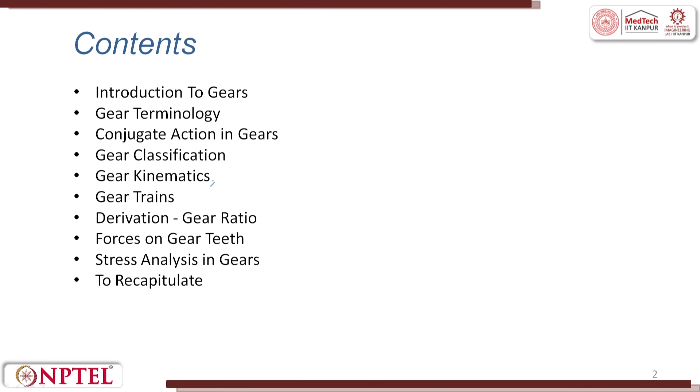Introduction to gears. If you look at all the photos here, these are all different types of gears. You can see gears where the gear teeth are along the axis of rotation, or at an angle inclined to rotation. Here you will see two gears which are trying to mesh. This is an input, this is an output. So, you can try to have multiplication or you can try to reduce, whatever you want. So, all these things are gears.

A gear is a rotating machine element with teeth that mesh with another toothed part to transmit torque. The teeth can be inside, or they can be on the periphery. The mating partner should also have gear teeth. Gears are used to change the speed, torque and the direction of the power source.

They work by transmitting rotational motion and force between two or more shafts, which allows for precision control of mechanical systems. A Swiss watch, where the time used to be very minutely controlled, has a lot of gears. One of the engineering marvels in the mechanical engineering domain is watch manufacturing, very precise watch manufacturing, which happened 150 years ago.

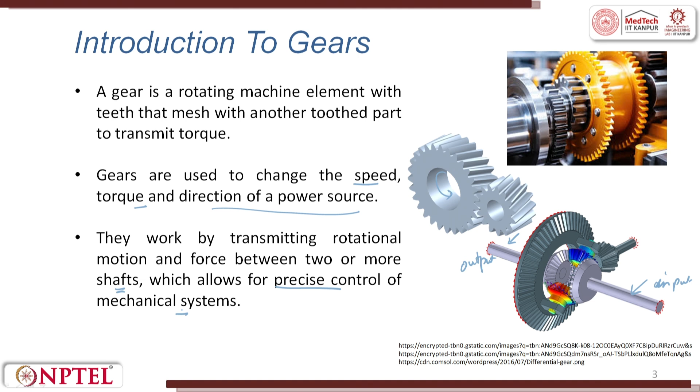Applications. Gears are integral to many mechanical systems, including automobiles, automotive transmissions, industrial machinery, clocks, and even small devices like electric drills. This is the example I was trying to talk about, the internal gear. Inside you have teeth, and then you have a pinion which goes around it, meshing the teeth.

So, this is worm and worm gear, wherein you have a worm and this is the worm wheel. Here you will have teeth with a similar profile, so these two mate with each other. You can have external gears. You can have rack and pinion, wherein the rack is for straight line motion and the pinion is for rotary motion. You can have a pawl and ratchet mechanism, which we saw in the previous lectures.

Screw gears are also there. Almost all different types of gears are shown here in this figure. Their ability to efficiently transmit power and adjust the mechanical advantage makes them essential in a wide range of applications.

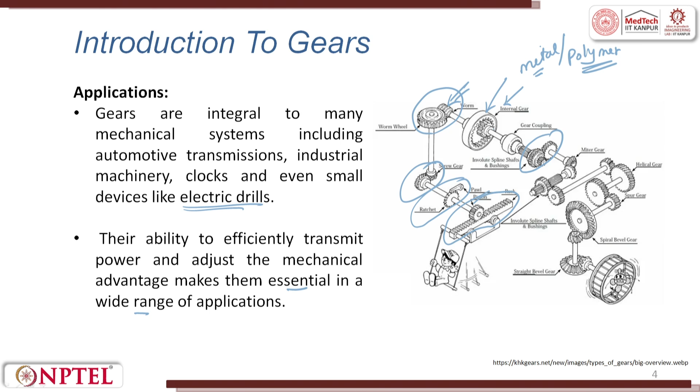You can use anything of your choice depending upon your requirements. So, gear classification based on shaft arrangement. What is a shaft? This is a shaft, and on a shaft you press fit and keep a gear, or the shaft and gear are an integral part of the same part. Both are possible. Depending upon the diameter of the gear, it can be used for multiplication or division. That means to say, for one rotation it can rotate 5 times, or it can rotate 5 times to do one rotation. Both are possible.

So, when you have parallel shafts, the gear we use is the spur gear. The most common type of gear, with straight teeth that are parallel to the axis of rotation. This is very easy to manufacture, and it also has proper meshing. Thus, these gears are used in simple machinery like clocks and conveyors, where the shafts are parallel.

Similar to the spur gear, we have the helical gear. The only difference between spur and helical is that the teeth are cut at an angle. So, what is the difference? Why do we have to go for this? Here, when it runs, a smoother and quieter run is achieved by the helical gear, and there is more contact area. So, loads can be heavier compared to the spur gear. Helical gears are used in automotive transmissions and other applications requiring high speed and high load capacity.

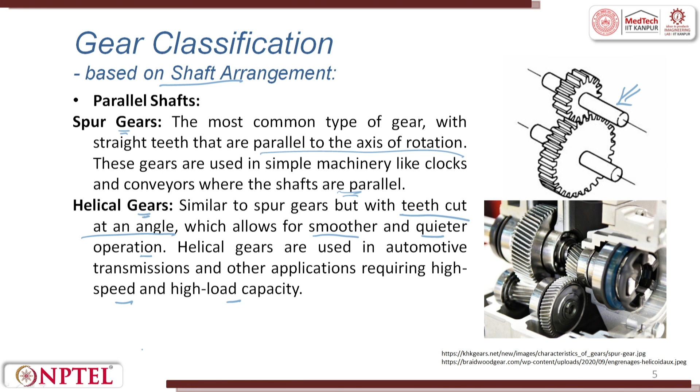Hypoid gear. These gears are similar to bevel gears, but with an offset between the axes. So, between this axis and this axis there is an offset, providing a combination of parallel and intersecting shaft advantages. They are used in automobiles for smooth power transmission. If you see, almost all the gears are used in automobiles: spur gear, helical gear, bevel gear, worm gear and hypoid gears. Everything is used everywhere. The only difference is the direction, the power and the speed. The axis from where the drive is given can be parallel, perpendicular, intersecting or non-intersecting.

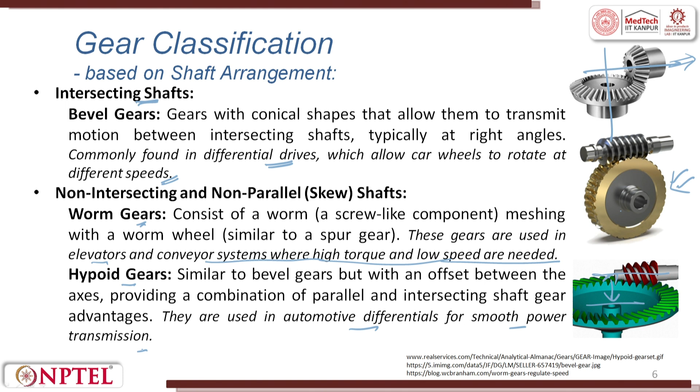So, classification based upon tooth design: straight teeth. Straight teeth are always found in spur gears. They have teeth straight and parallel to the gear axis. They are simple and cost effective, but can be noisy at high speed. In order to avoid the noise, we go for helical gears. The gear teeth are cut at an angle to the gear axis, which allows for more gradual engagement of teeth, resulting in quieter and smoother operation.

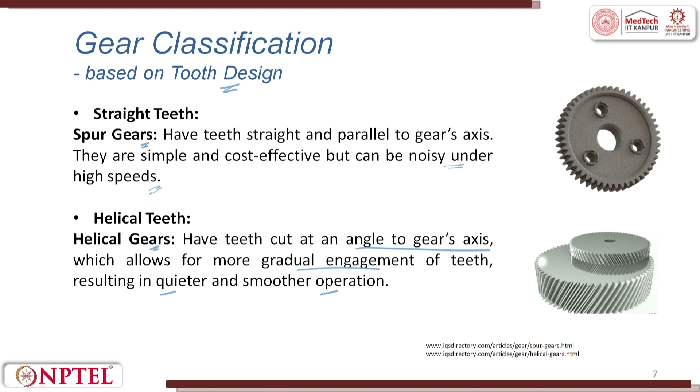You have double helical gears, or double helical teeth. Double helical teeth are called herringbone. A double helical gear features two helical sections. You can see 1 and 2. This is 1 and this is 2, right. So, two helical gears join together with opposite helix angles, which eliminates axial thrust and balances out the force. These are used in heavy machinery like turbines and compressors.

You can also have curved teeth. The teeth are all curved. For example, bevel gears often have curved teeth to provide smoother engagement and transmission of torque between intersecting shafts.

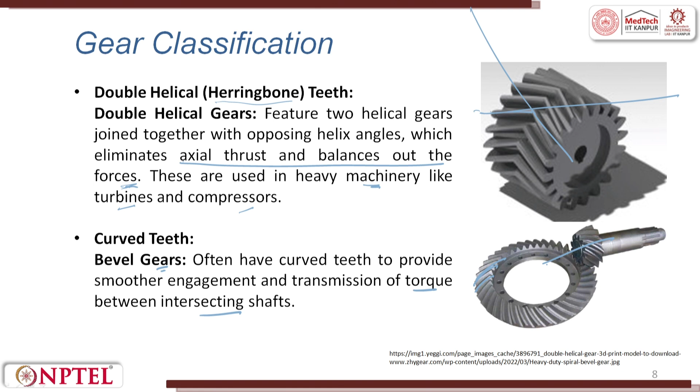So, what are the practical applications? Spur gears are found in simple mechanical devices like clocks, washing machines, conveyors. Helical gears are used in automobile transmissions, mixers and heavy machinery requiring smooth and quiet operation. Bevel gears are employed in automobile differentials, hand drilling and rotating devices requiring change in direction of drive.

Worm gear is used in tuning instruments, elevators and hoisting equipment due to the ability of high torque and low speed. Hypoid gears are seen in the differential of rear wheel drive cars, where they provide smoother power transmission between the engine and the wheel. There are front wheel drive cars, rear wheel drive cars. In rear wheel drive cars, hypoid gears are used, where they provide smoother power transmission between the engine and the wheels.

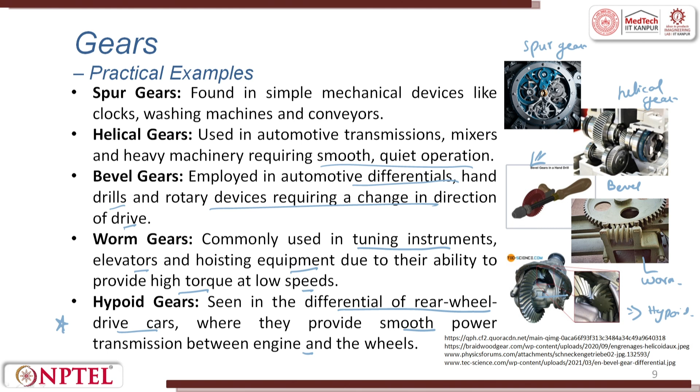If you look at it, this is a hand drilling machine, in which you use a bevel. This is a gear train used in a lathe machine for changing the speeds. Inside a gear box, helical gear. Inside a watch, spur gear. This is worm and this is hypoid. Various examples are given. If you see here, you see the axis, you see the inclined angle of the teeth, it will be more clear.

Now, let us understand some of the gear terminologies. In gear, there are several terminologies, so we will try to cover one after the other. The first one is called the pitch circle. Pitch circle is the theoretical circle upon which all calculations are usually based. Its diameter is called the pitch diameter. If you see here, pitch circle is written, you see a dotted line which goes. So, the diameter is the pitch diameter for the pitch circle. For discussion sake, it can be half or slightly above half.

The pitch circles of a pair of mating gears are tangent to each other. So, this one and this one are tangent to each other. A pinion is the smaller of two mating gears. The larger one is often called a gear or a bull gear. So, larger gear, smaller gear.

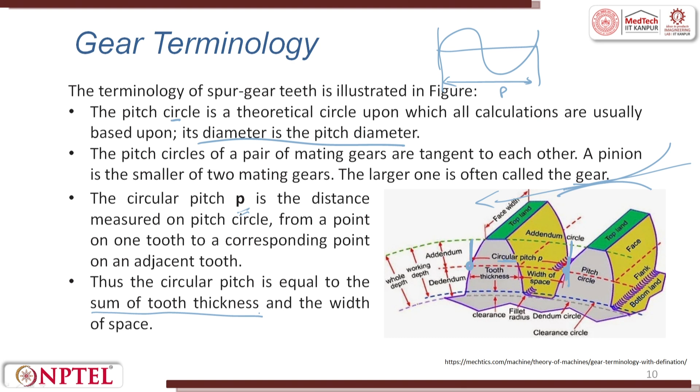The circular pitch P is the distance measured on the pitch circle from the point of one tooth to the corresponding point of the adjacent tooth. You see here P, circular pitch. So, circular pitch is from this point where it is starting to the next point. If you take pitch in a sinusoidal wave, this is called a pitch. In a gear, it is also the same, from the end of one tooth to the end of the other tooth. Thus, the circular pitch is equal to the sum of tooth thickness and the width of the space.

Module. Module is the ratio of the pitch diameter to the number of teeth. The customary unit of length used is millimeter. The module is the index of tooth size in SI. So, module is the ratio of the pitch diameter to the number of teeth, let us take it as N.

Diametral pitch P is the ratio of the number of teeth on the gear to the pitch diameter. This is the reciprocal of module. The inverse of module is diametral pitch P. Since diametral pitch is used only with US units, it is expressed as teeth per inch. So, 1 by module, the inverse of module, is diametral pitch.

Addendum and dedendum. From the pitch circle diameter to the tip of the gear is called addendum. From the pitch circle diameter to the root, it is called dedendum. This is an approximate definition. Let us see. The addendum A is the radial distance between the top land and the pitch circle. Top land to the pitch circle is addendum.

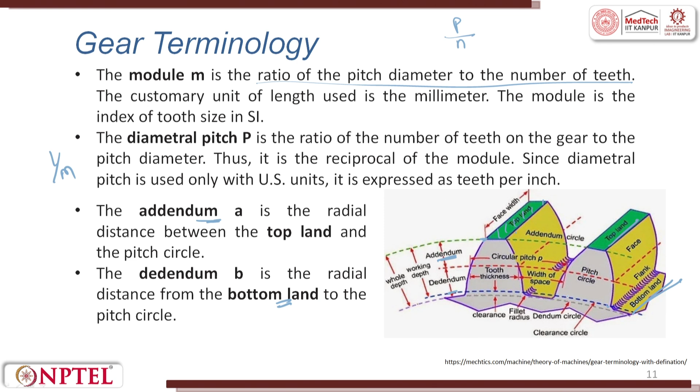The dedendum is the radial distance between the pitch circle and the bottom land. This is called the top land, and this is called the bottom land. Between the bottom land and the pitch circle is called the dedendum. Whole depth, HT, is the sum of A plus D, called the whole depth.

The clearance circle is the circle that is tangent to the addendum circle of the mating gear. So, suppose if it is going like this, it will go like tangent, right. So it is a circle that is tangent to the addendum circle of the mating gear.

The clearance C is the amount by which the dedendum in a given gear exceeds the addendum of the mating gear. Clearance C is very important. This is the whole depth, A plus D, and this is the working depth. The difference between the two is called the clearance C. So when two gears meet, there has to be a small clearance. Perfect contact means it is going to be very tough, there will be a lot of friction.

Backlash is the amount by which the width of the tooth space exceeds the thickness of the engaging tooth, measured on the pitch circle. Backlash is also a very important phenomenon. So when two teeth meet, there will always be a small clearance. This small clearance is called backlash, because what is the effect of backlash?

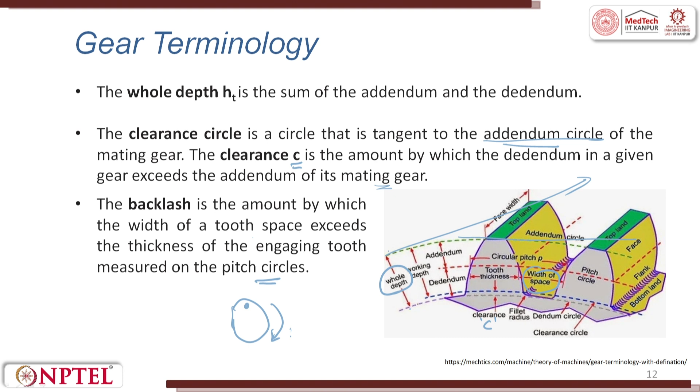So when you rotate it in the forward direction, you might come back to this position at zero point. But when I reverse it, when I want to come back, the angle of rotation need not be the same. If it is not the same, then it is called backlash. As and when wear and tear happens on the teeth, you will always have more backlash. I repeat, the width of the space exceeds the thickness of the engaging gear which enters inside.

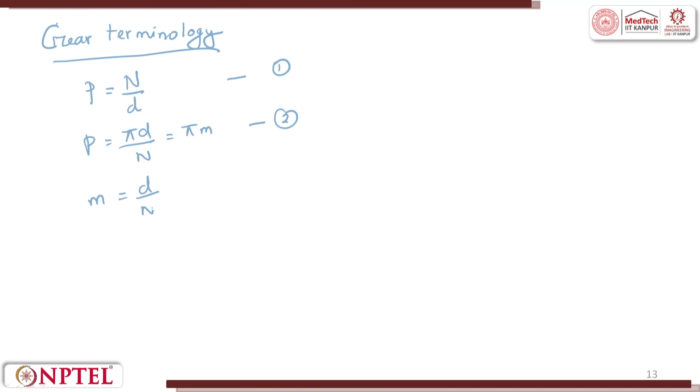So let us see some of the other gear terminologies. The formulas we have discussed: P is equal to N by D, P is equal to pi D by N, which is pi M. M is the module, which is D by N. Then we have small p, p times P is equal to pi. This is the fourth equation.

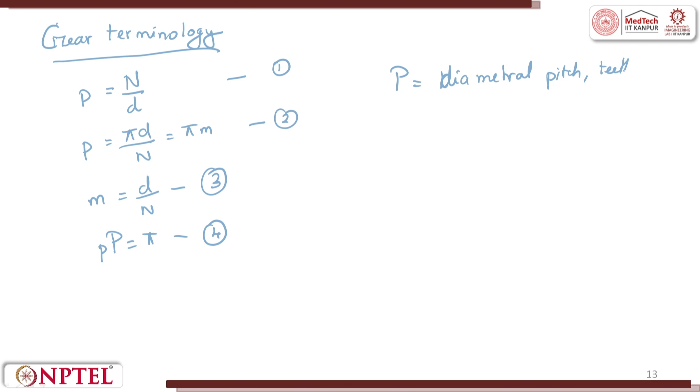So now let us write it down. P is the diametral pitch, or teeth per inch. Then N is the number of teeth. D is the pitch diameter. Then we have M, which is the module. The last one is small p, which is the circular pitch. So these are important formulas which we discussed till now.

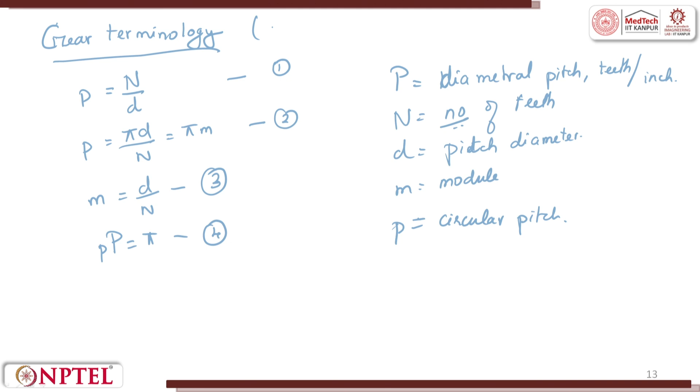Conjugate action in gear. Conjugate action refers to the specific motion relationship between two meshing gears, where the contact between their teeth maintains a constant velocity ratio throughout its rotation. So this is very, very important. Conjugate action refers to a specific motion relationship between two meshing gears, with the contact between the teeth maintaining a constant velocity ratio throughout the rotation.

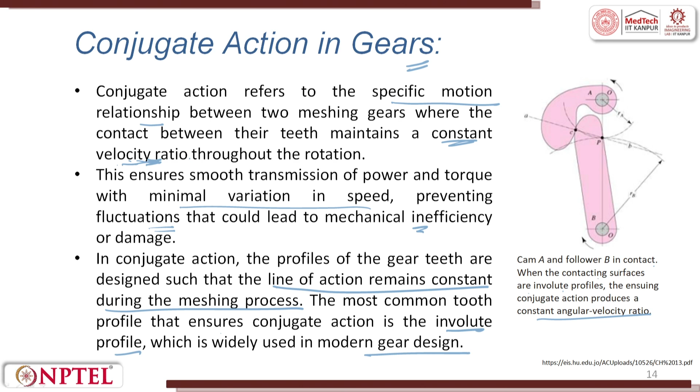In conjugate action, the profile of the gear teeth are designed such that the line of action remains constant during the meshing process. The most common tooth profile that ensures conjugate action is the involute profile, widely used in modern gear design. Conjugate action in gear is very important; you try to get a constant velocity ratio such that there are no velocity fluctuations, leading to force fluctuations.

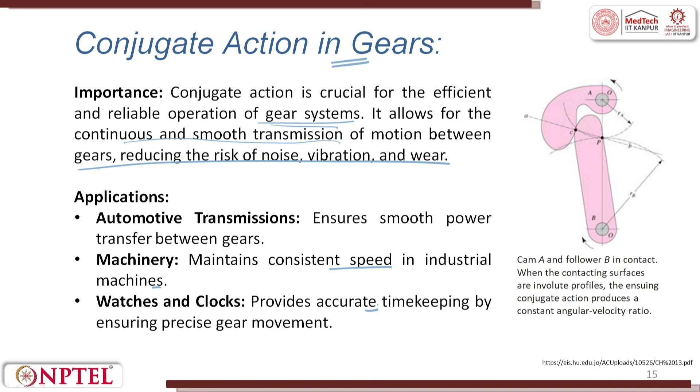So the importance is, conjugate action is crucial for efficient and reliable operation in gear systems. It allows for continuous smooth transmission of motion between gears, reducing the risk of noise, vibration and wear. It finds application in automobile transmission, ensures smooth power transfer between gears, maintains consistent speed in industrial machines, watches and clocks, providing accurate timekeeping by ensuring precise gear movement.

We were talking about velocity ratio. So what is velocity ratio? You are supposed to understand this. This falls under the topic of gear kinematics. So there are two gears: one is called the driven gear, the other one is called the driving gear.

The velocity ratio in gears refers to the ratio of the angular velocity of the driven gear, or moved gear, to the angular velocity of the driving gear, or moving gear. The driving gear will be attached to a motor or something. It is a key parameter in determining the mechanical advantage and the speed reduction or increase provided by the gear system.

Velocity ratio is written as angular velocity of driven gear divided by angular velocity of driving gear. It can also be written as number of teeth on the driving gear divided by number of teeth on the driven gear. Notice it is inverse: velocity ratio equals angular velocity of driven gear divided by angular velocity of driving gear, but in terms of gear teeth, it's number of teeth on driving gear divided by number of teeth on the driven gear.

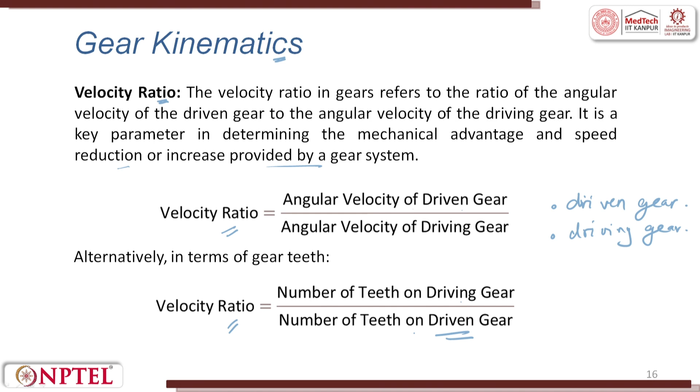The velocity ratio helps in understanding the speed and torque relationship between the gears. A higher velocity ratio indicates that the driven gear will rotate slower but with more torque. That is what I said - when you use gears, we try to change the speed, the torque, and the power. A higher velocity ratio means the driven gear rotates slower with more torque, while a lower velocity ratio means the driven gear rotates faster with less torque.

Please understand the difference. Let us try to solve a simple problem. Consider a simple gear train where the driving gear A has 20 teeth and the driven gear B has 40 teeth. The formula is: velocity ratio equals teeth on gear A divided by teeth on gear B, so 20 by 40, which is 1 by 2. This means that for every 2 rotations of gear A, gear B makes 1 revolution.

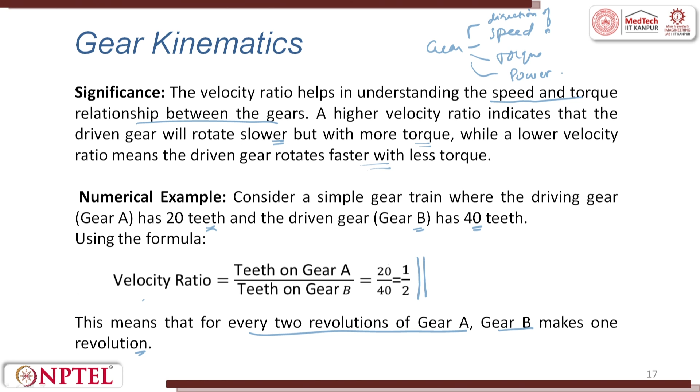Moving further into gear trains, there are simple gear trains, compound gear trains, reverted gear trains, and epicyclic gear trains. Simple gear trains consist of 2 gears, commonly used to change the speed or the direction of motion. So you should also note that it also changes the direction of motion.

Compound gear trains involve multiple gears on the same shaft, allowing for greater speed or torque variation. You can have multiple gears - for example, this is called a compound gear. You will have an idler in between, a compound gear, an idler, and you can have multiple outputs. So, a simple gear train has only 2 gears, whereas a compound gear train involves more than 2, allowing greater speed or torque variation.

A reverted gear train is a special compound gear train where the input and output shafts are coaxial - look at it, they are coaxial.

Epicyclic or planetary gear trains - here you rotate this, and all the other gears rotate, consisting of one or more outer gears. These are all called planetary gears, revolving around a central gear called the sun gear. It is also called the sun and planet gear train. In the center you rotate, all the other gears rotate, and you can try to get multiple outputs.

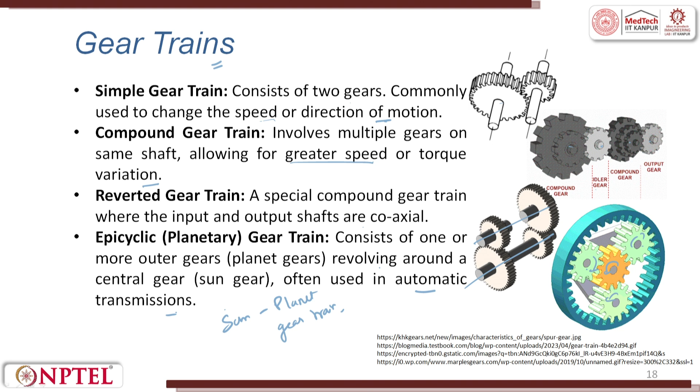This is often used in automatic transmission. Speed and torque alterations: gear trains modify the rotational speed and torque with respect to input and output. In a simple gear train, as we saw, the gear ratio determines the relationship between the speed of input and output gear, impacting the torque inversely.

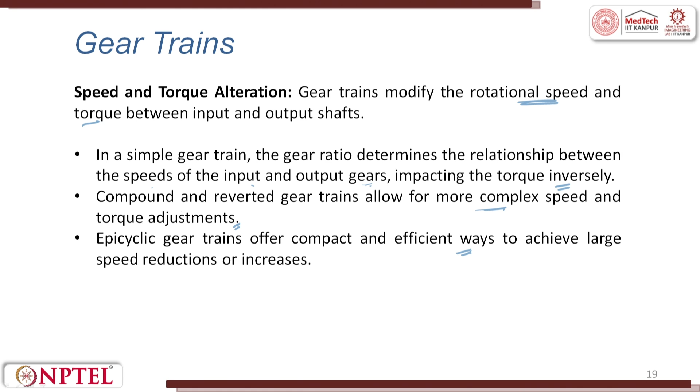Compound and reverted gear trains allow for more complex speed and torque adjustments. Epicyclic gear trains offer a compact and efficient way to achieve large speed reduction or increase.

Various applications: simple gear trains are used in clocks and conveyors. Compound gear trains are found in bicycles - this is compound in your gear cycle, where you have multiple gears with multiple teeth, all attached. They are also found in heavy machinery.

Reverted gear trains are utilized in automotive transmission - in automotive transmission, you can have this setup. Epicyclic gear trains are a key component in automatic transmission and differential systems - this is a differential system, DS.

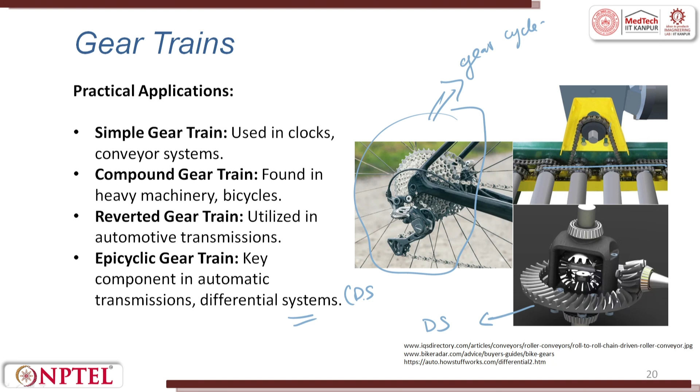Gear ratio is one of the most important things we deal with. The number of teeth on the driven gear divided by the number of teeth on the driving gear gives you the gear ratio.

When two gears are in mesh, the number of teeth on the gears determine their rotational speed. Gear ratio will be used for multiplying or dividing the speed. So it can multiply in terms of increasing the speed or decreasing the speed.

The gear ratio is defined as the ratio of the angular velocity of the driving gear to the angular velocity of the driven gear, so angular velocity ratio is always written as omega. Let N1 be the number of teeth on driving gear G1, and N2 be the number of teeth of driven gear G2. Omega 1 and omega 2 be the angular velocities of gear 1 and gear 2 respectively.

When the gears are meshed, the linear velocity at the pitch circle of both the gears must be equal: omega 1 into R1 equal to omega 2 into R2. R1 and R2 are the pitch radii of gear 1 and gear 2 respectively. So, omega 1, omega 2.

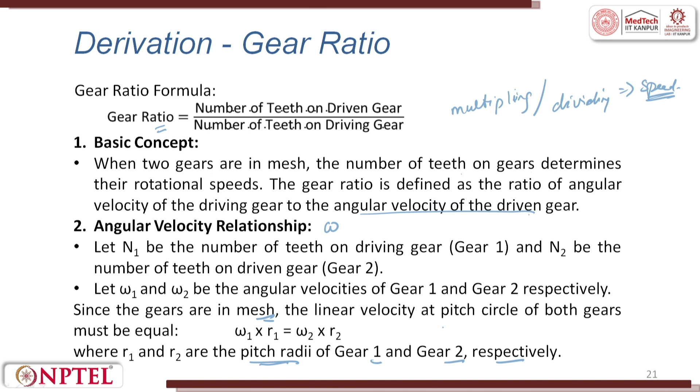Gear ratio G is defined as the ratio of the angular velocity of the driving gear to the angular velocity of the driven gear, so it can be rewritten as the number of teeth on the driven gear divided by the number of teeth on the driving gear. The gear ratio is a very crucial component in determining the speed and torque output of the gear system. Higher the gear ratio implies a reduction in speed but an increase in torque.

If the gear ratio is high, then torque is high, speeds are low. This is very important, because when the gear train ratio is high, torques are very high. I can lift heavy things, speed will be low. So when I lift heavy things, the speed will be low.

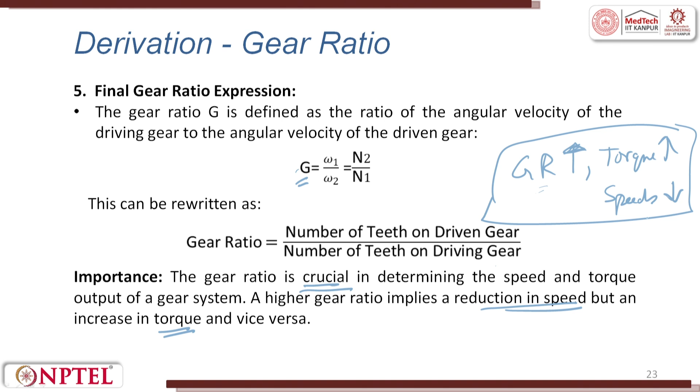So let us try to solve a simple numerical problem to understand the concept we have seen till now. You have a pair of gears where the driving gear Gear 1 has 20 teeth and the driven gear Gear 2 has 60 teeth. Calculate the gear ratio.

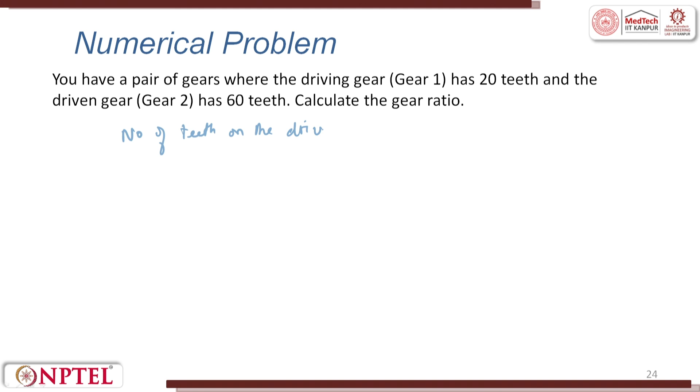Number of teeth on the driving gear is 20, which is equal to N1. Number of teeth on the driven gear is 60, which is N2. So the gear ratio formula is G equal to number of teeth on driven gear divided by number of teeth on driving gear, which is 60 by 20, which is 3.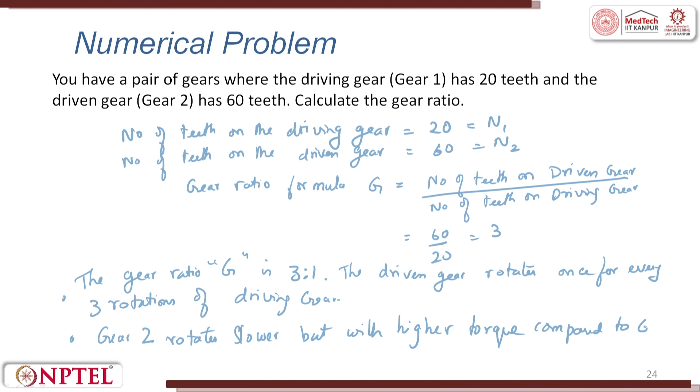So the gear ratio G is 3:1, which means the driven gear rotates once for every 3 rotations of the driving gear. So this also indicates that gear 2 rotates slower but with higher torque compared to gear 1.

So, efficiency of the gear. Gear efficiency refers to the ratio of the output power delivered by the gear system to the input power provided to it, which is expressed generally in terms of percentage. It measures how efficiently gear transmits power from the driving gear to the driven gear. High efficiency means less energy loss, so higher the percentage, loss will be lesser, which is crucial for the performance and the longevity of a mechanical system.

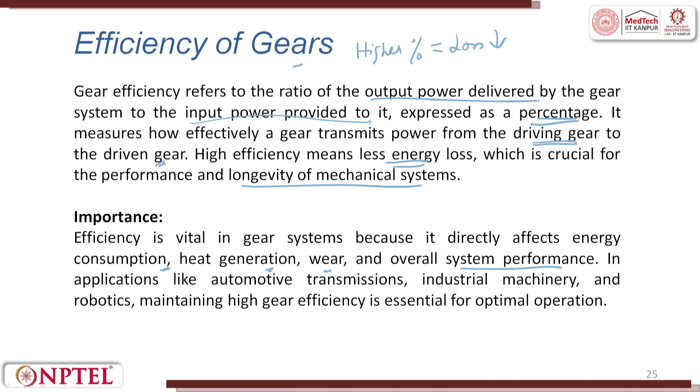Output by input, output power delivered by input power provided. Efficiency is vital in gear systems because it directly affects the energy consumption, heat generation, wear, and the overall system's performance. This is very much used in automotive transmission, industrial machinery, robotics. Maintaining high gear efficiency is essential for optimal operations.

So the factors affecting the efficiency are friction, lubrication, gear material, gear alignment and surface finish. Friction occurs when there are undulations on the surface and a matching undulation on the other surface, and as these move against each other, there is going to be a huge friction. The primary source of power loss in gear, which can be minimized with proper design and material, is friction.

Lubrication, in between these two, you can try to have a solid, liquid or a gas lubrication. Adequate lubrication reduces friction and wear, thus improving the efficiency. The gear material can be chosen depending upon the friction and the load of transmission, so different coefficient of friction, thermal properties, impacting efficiency. So you can try here metal, polymer, or a metal ceramic coating, or metal polymer coating.

So, this is only to reduce the friction, but the other load will be taken by the metal part of it. Gear alignment - misalignment can increase the friction and thereby reduce the efficiency. There is a shaft, there is one more shaft, and between these two shafts the alignment should be proper. That is why today we use something called flexible coupling. This takes care of the gear alignment problem, the misalignment problem.

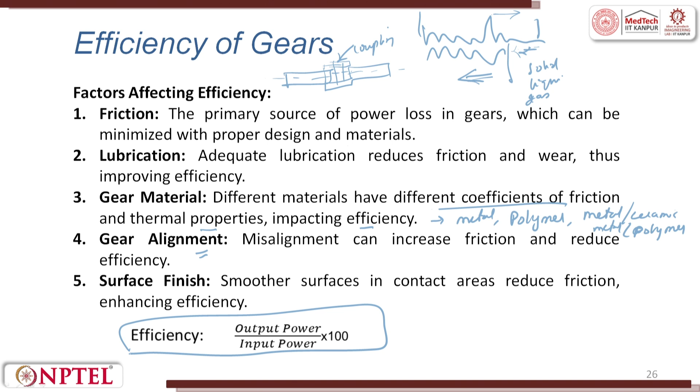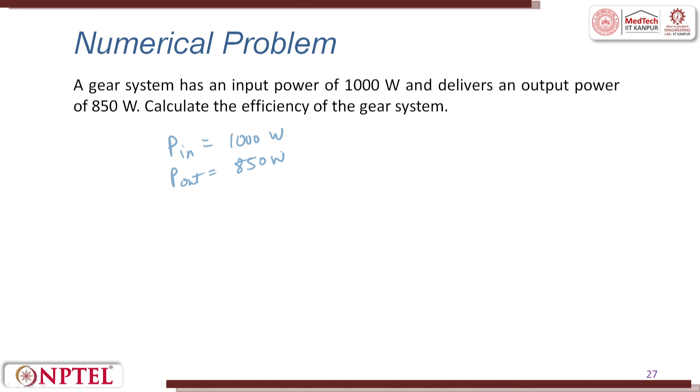Let us try to solve another simple problem to understand power and efficiency. The gear system has an input power of 1000 watts, so P in is equal to 1000 watts, and the P out is 850 watts. What is the efficiency? Efficiency is P out by P in into 100. So this is 850 by 1000 into 100, which is 85%. So the 85% is the efficiency of the system.

The 15% whatever was the loss can be because of friction, because of misalignment, can be because of surface finish. All these things can lead to heat and wear.

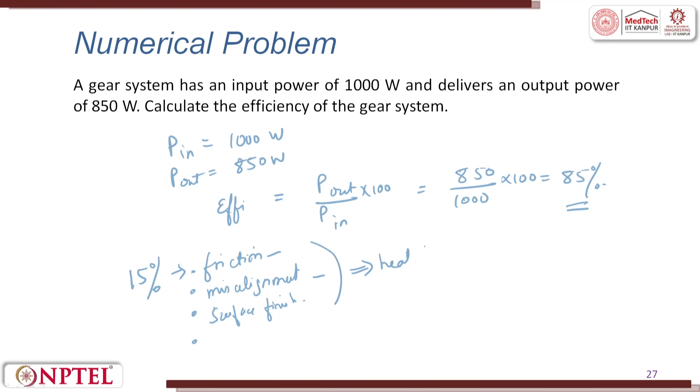So what are the forces which are generally involved in a gear? Forces on a gear teeth - during the operation of a gear, forces are transmitted from one gear to another through the contact of the teeth. These forces are crucial. You can see here there is Fx along the x direction, there is Fr along the radial direction, there is Ft which is the torque.

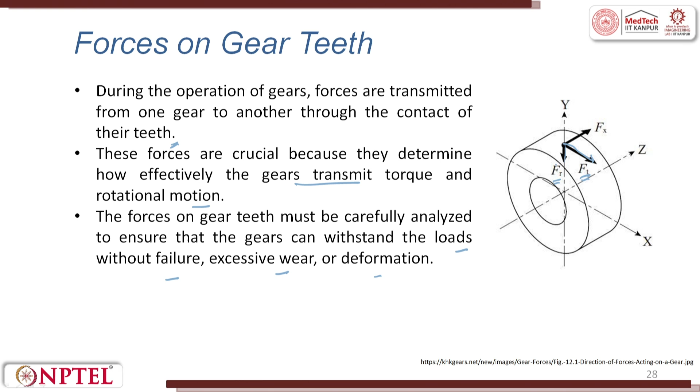These forces are crucial because they determine how efficiently the gear transmits torque and rotational motion. The forces on the gear must be carefully analyzed to ensure that the gears can withstand the load without failing, without having excessive wear or deformation. So the forces are very important to be calculated.

Radial force is the downward force, or it is a force from the radius. The radial force acts perpendicular to the tangential force and is directed towards the center of the gear. It does not contribute to torque transmission, but causes internal stresses and potential deflection - bending of the gear happens. Radial force is also very important. So for transmission it will be tangential, for radial it will be the internal stresses and the potential deflection.

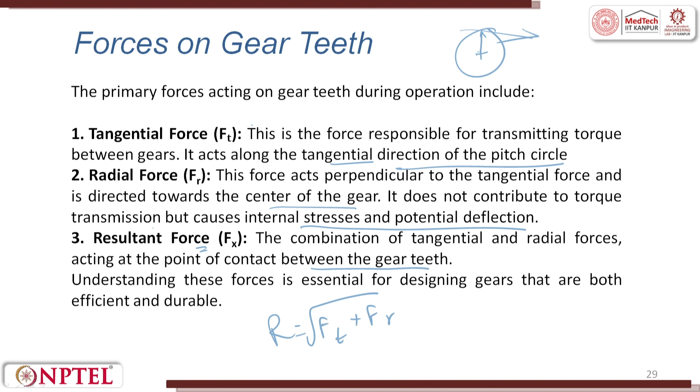A combination of these two, R is nothing but Ft plus Fr, maybe the root. So resultant force is a combination of tangential force and radial force acting on the point of contact between the gear teeth. Understanding all these forces is very, very important.

So a small simple derivation we will try to do, because here we are more interested in power, and power is always found from the torque. The torque in turn can be found from the ratio N1 by N2, or N2 by N1, whatever it is.

Derivation: the force on a gear teeth can be derived from the relationship between torque and the pitch radius of the gear. The torque T is the rotational force applied on the gear. The pitch radius R is the radius at which the force is assumed to act, typically the radius of the pitch circle, radius R. So the tangential force Ft - torque is equal to Ft into R, or if you want to find the tangential force, it is going to be torque divided by radius. This will give me my tangential force.

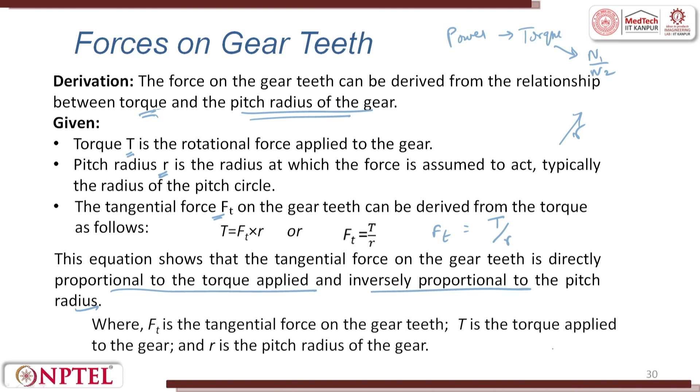This equation clearly shows that the tangential force on the gear teeth is directly proportional to the torque applied and inversely proportional to the pitch radius. If the pitch radius is large, then the tangential force is going to be low, where Ft is the tangential force on the gear teeth, T is the torque applied to the gear, and R is the pitch radius.

Based on the understanding, we will try to solve a simple problem. The gear train has a torque which is 200 Newton meter. The pitch radius R is equal to 0.1.

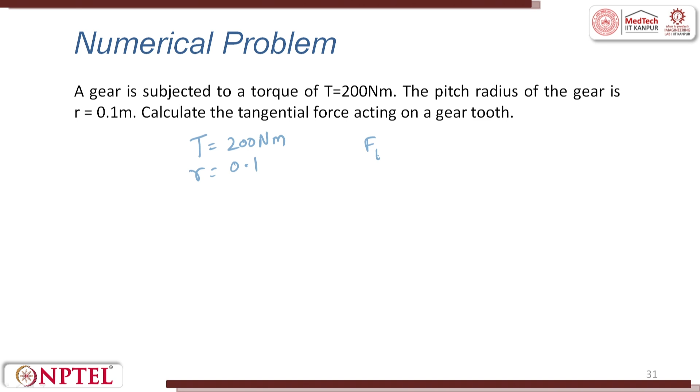What is Ft? Ft is nothing but T by R, the torque divided by radius. So from the formula, Ft equal to T by R, we get 200 Newton meter divided by R which is 0.1, which is equal to 2000 Newton. So the tangential force Ft is equal to 2000 Newton.

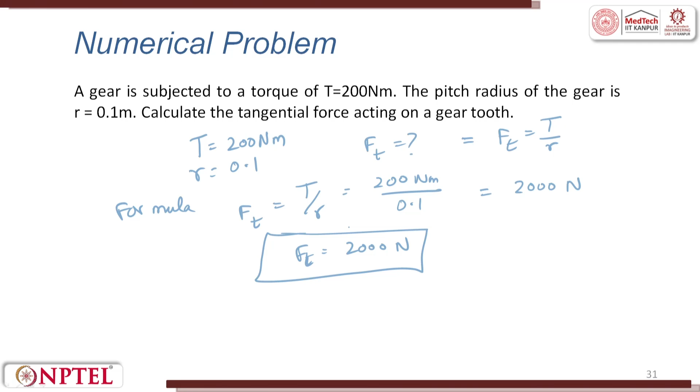So the stresses, now we saw, after seeing the force per unit area, is stress analysis in gears. There are two types of stress analysis generally we do to understand the ballpark figure. We try to do a bending stress, and then we also try to calculate the contact stress.

Bending stress occurs in the gear teeth due to the tangential force applied at the pitch point, leading to a potential failure through tooth breakage.

Contact stress arises from the localized contact between the gear teeth during meshing, which can lead to surface fatigue or pitting.

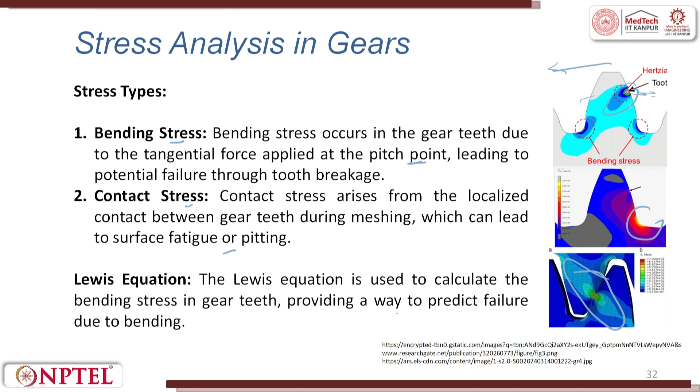The Lewis equation is used to calculate the bending stress in gear teeth, providing a way to predict failure due to bending.

So what does this Lewis equation say? Consider a gear tooth subjected to a tangential force Ft at a pitch point. Pitch point is a point on the pitch circle. The tooth can be modeled as a cantilever beam, and the bending stress at the root of the tooth can be expressed as M divided by S.

What is M? M is the bending moment at the tooth root. S is the sectional modulus of the tooth. So with this we can try to figure out what is the bending stress in a gear.

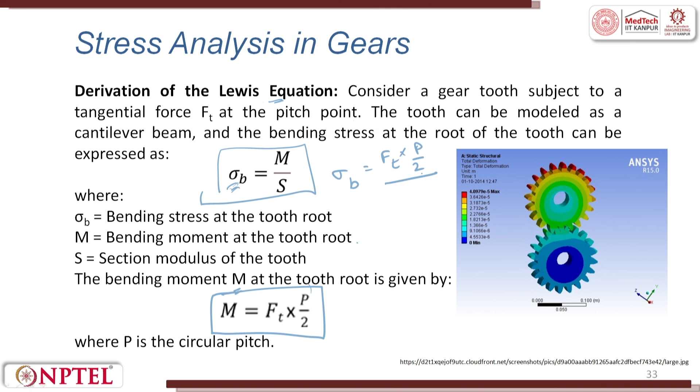The bending moment at the tooth root is given as Ft into P by 2, where P is the circular pitch. So sigma B will be Ft into P by 2 divided by the sectional modulus.

The sectional modulus of a gear can be found out by S is equal to Fm into Y. What is Fm? It is the face width, and Y is the Lewis form factor.

So now if we put everything into the equation for finding out the bending stress, it is Ft into P by 2 divided by Fm into Y, which is nothing but Ft into P divided by twice of Fm into Y. So to simplify, we multiply both sides by 2, and we finally get sigma B is equal to Ft into P by Fm into Y.

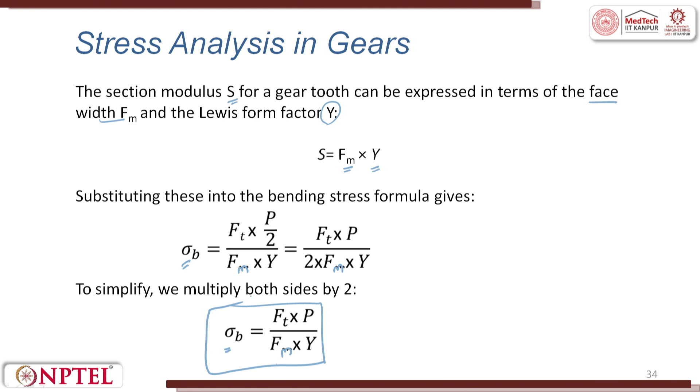This is how we get the bending stress for a gear, where sigma B is the bending stress, P is the pitch, Y is the Lewis form factor, Ft is the tangential force, and face width is Fm.

So where do we use this? The Lewis equation is crucial in gear design to ensure that the gears can handle applied load without bending failure. It is used predominantly in selecting the proper material and the gear dimensions.

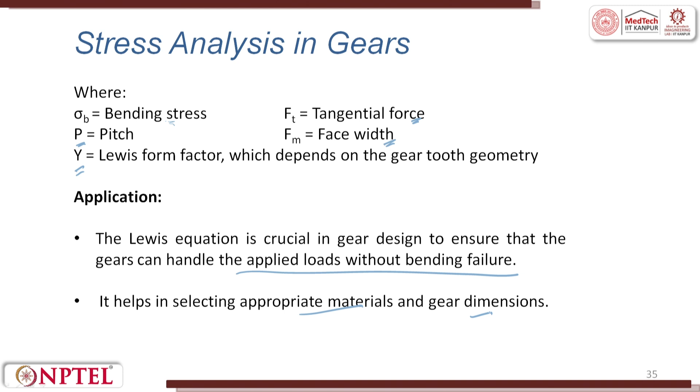Let us do a simple problem to understand the concept we studied. A spur gear is subject to a tangential force Ft equal to 500 Newtons. The gear has a pitch of 20 millimeters, the distance between one tooth and the other. The face width Fm is 10 millimeters, and the Lewis factor Y is 0.3.

Find out sigma B. Sigma B is nothing but Ft into P divided by Fm into Y, which is 500 into 20 divided by 10 into 0.3. So that is 1000 by 0.3, which is 10000 by 3, equal to 3333.34 megapascal.

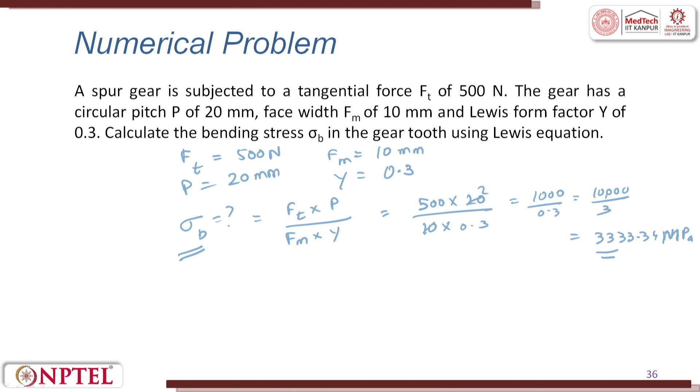The bending stress for a gear is found out to be 3333.34 megapascal. This is the bending stress on a tooth.

To recap what all we have covered in this lecture: we have first seen what is a gear, why gear is important, different types of gears, different types of teeth in a gear, what is pitch circle, module, and the differences between parallel, intersecting and non-intersecting shaft arrangements in a gear, and how to calculate the velocity ratio of a simple gear train.

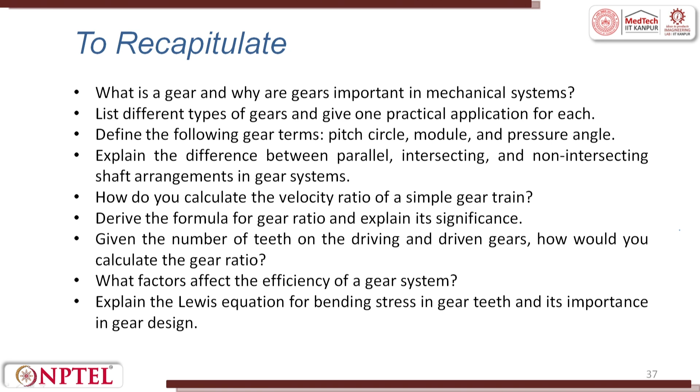We derived the formula for gear ratio and explained its significance, the number of teeth on the driving and driven gear, how to calculate the gear ratio, what is an efficient gear system, and when do we use the Lewis equation while designing a gear.